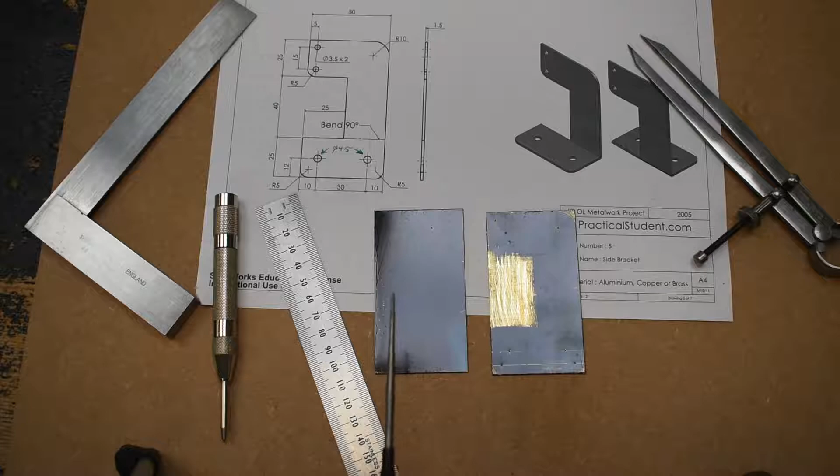This is the marking out of part 5 for the 2005 Ordinary Level Junior Cert project, the desk fan. There are two parts in part 5. Essentially they're the same, I'll speak when I'm finished about marking it out. There's two alternatives, so we're going to get started.

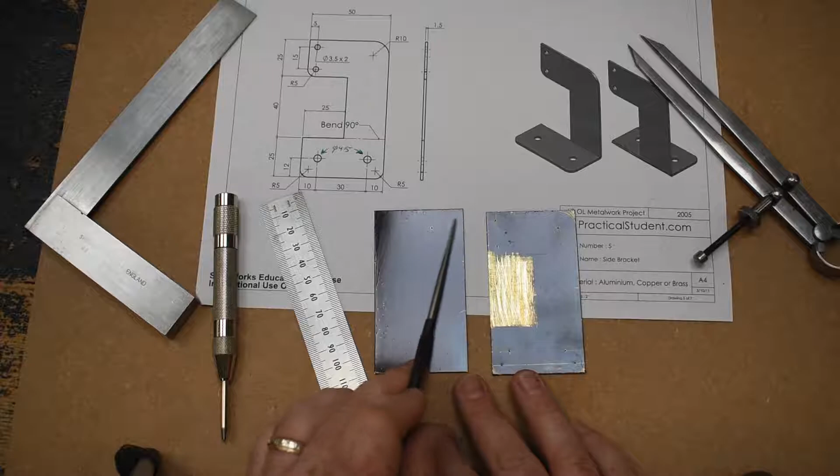The piece of metal I have is 1.5 brass. It's already cut on the guillotine to 90 millimeters in length by 50. We get those dimensions from 25 plus 40 plus 25 is 90, and 50 across. So put this second one aside for a second, we'll talk about that later on.

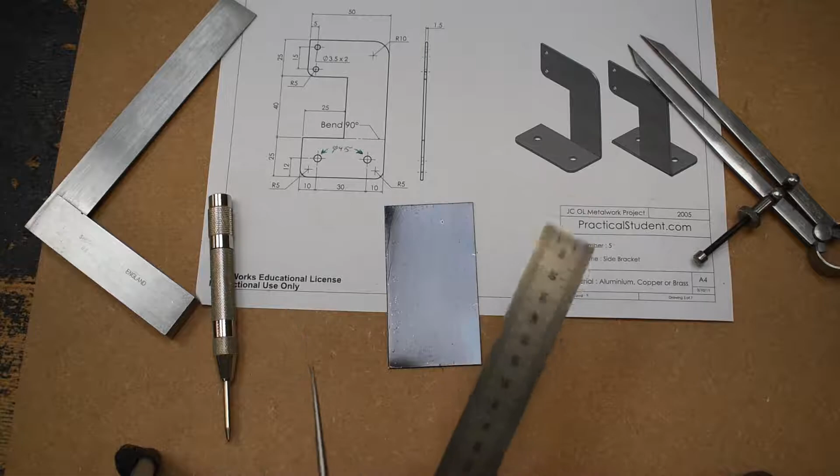I'm just going to mark out what we see here. I'll mark the general outline first, then do the curves, and then the location of the holes. So from the side here, it's up 25, then up 40, and that should leave me with 25. I'm going to mark those now.

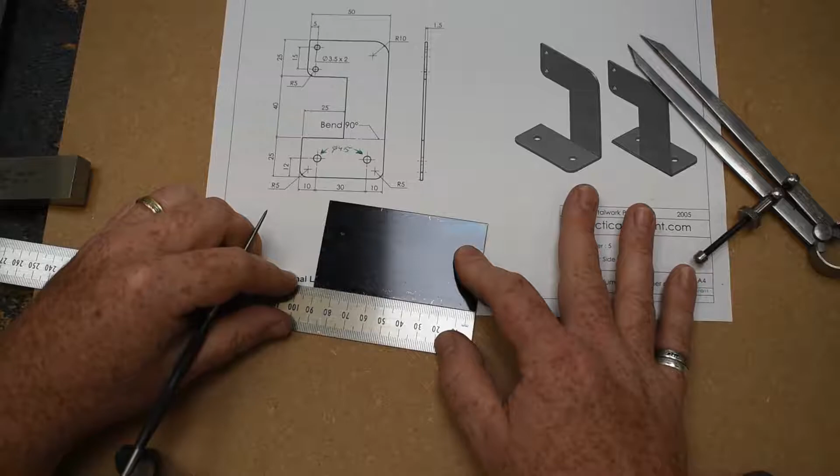From the bottom, marking 25. We could mark 25 from both ends, making sure everything is lined up. And T-square those lines over halfway across.

Again, thin material, so you must pick it up before scribing.

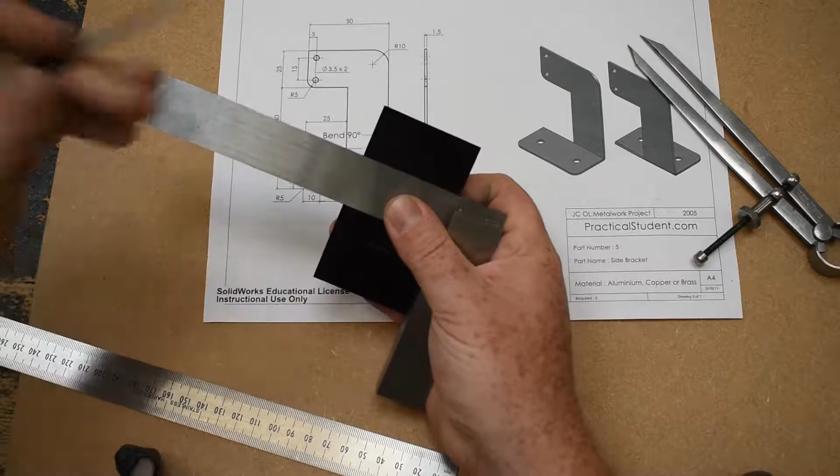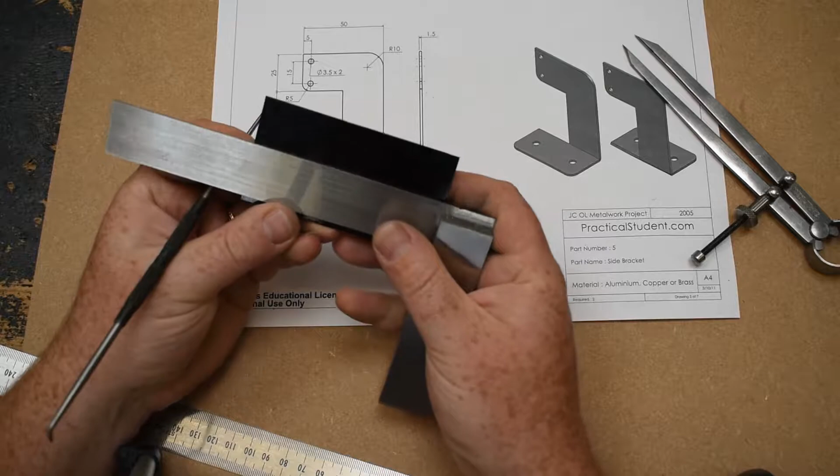Now this line up here is 25 in, it's halfway across, so again I'm going to measure 25 millimeters along the base, mark it, and T-square the line up just between the two other 25s that we have.

We're going to be removing this section later on, and I will show you how to best do that with a hacksaw.

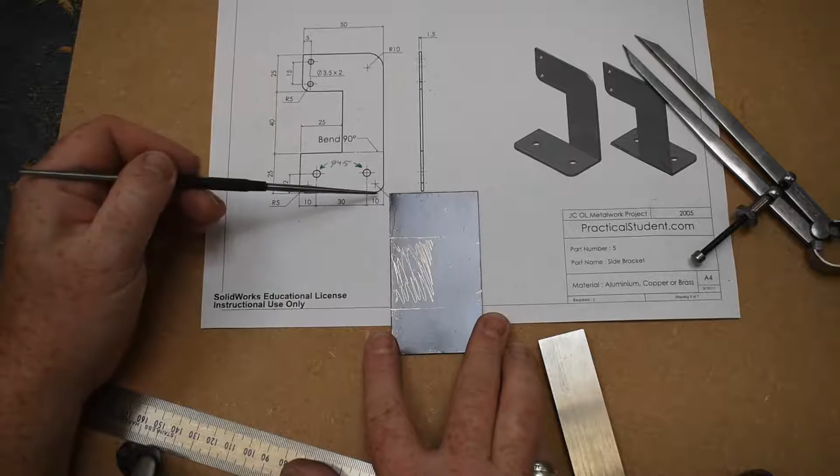Now that we've got those done, the next thing to do are the fillets. We've got 4 of them in total. I'm going to start with the largest one, and as always, wherever the radius is, that's the distance you come from both sides.

So in this case it's 10. I'm going to measure down 10 on this edge here.

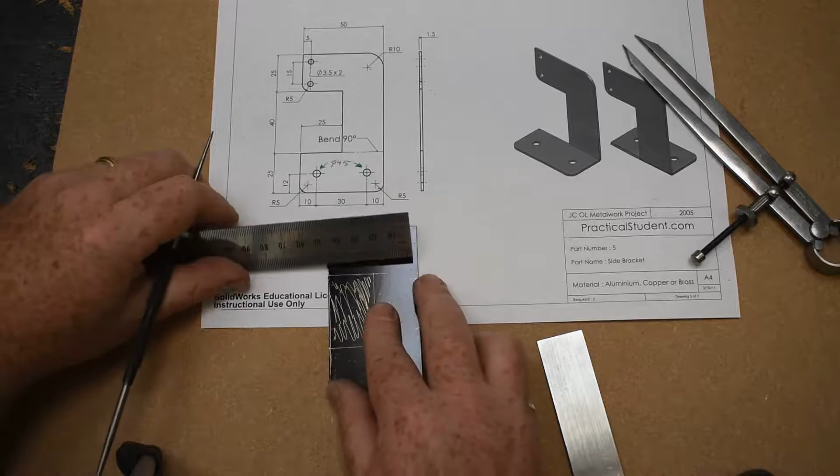Mark it, then measure across 10, and T-square both of those points to meet each other.

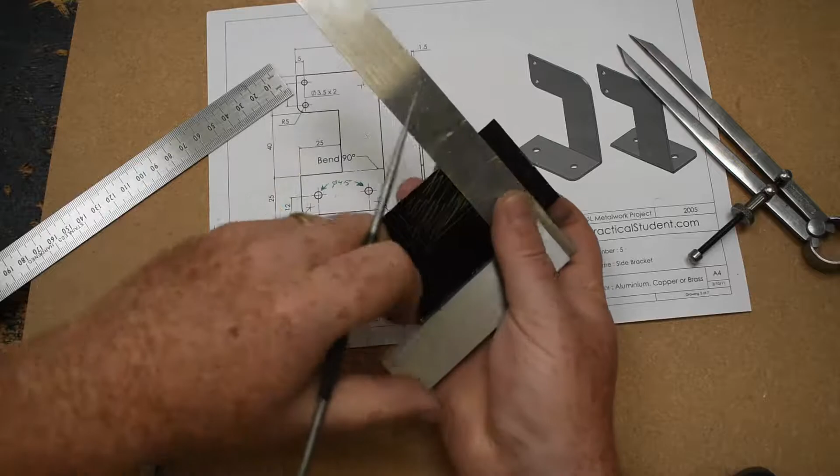Center punch that point, and I've invested in an automatic center punch to make my life easier.

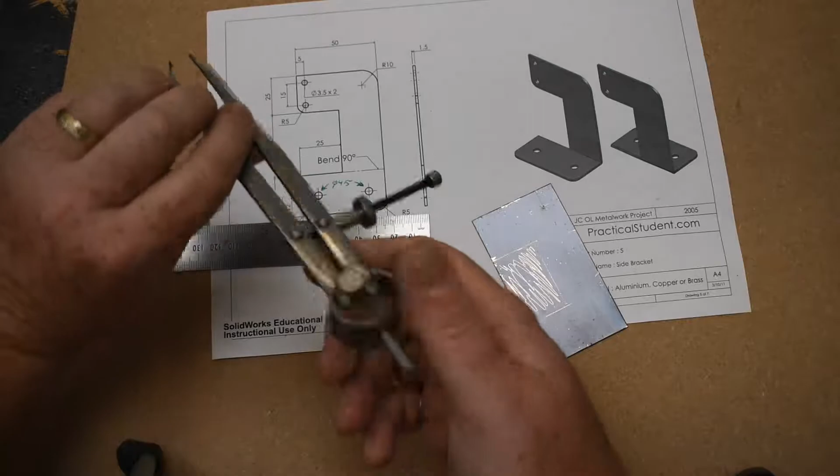Now we set our dividers to the same radius, 10, and draw the quadrant.

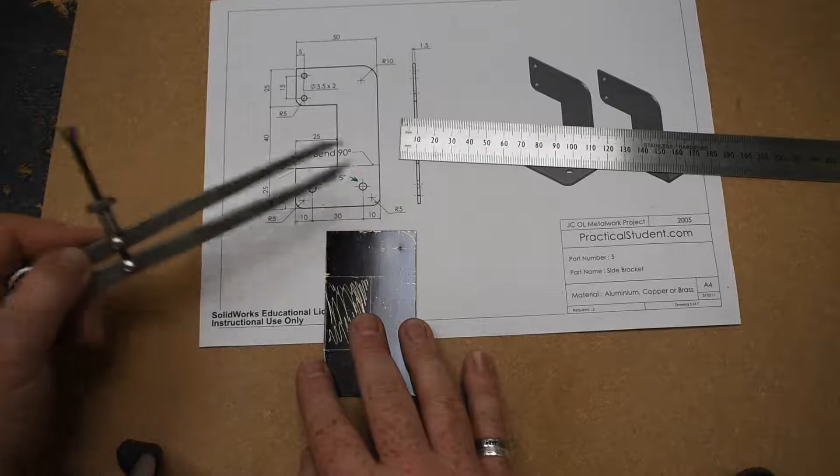We now have 3 more to do, 5, 5, and 5. I'm just going to try and mark those reasonably quickly. Measuring 5 across here.

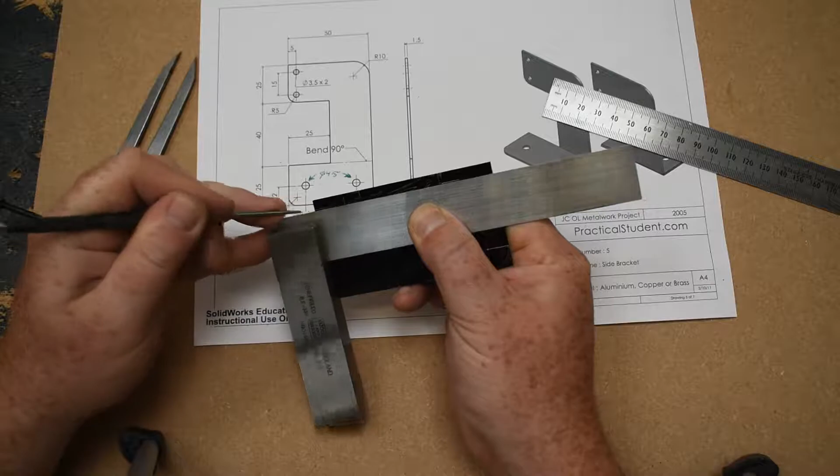I'm going to use my T-square and draw the line at this point, and to save time, do it down here as well. Now we want to measure 5 up this line.

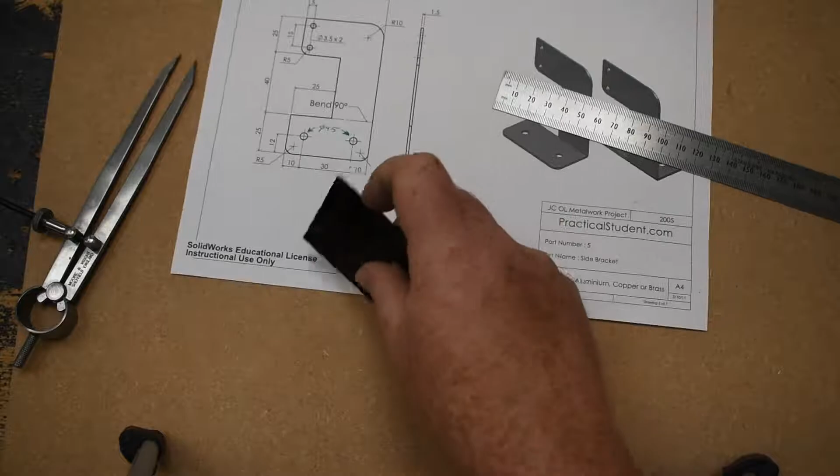I'm going to measure 5 here and T-square that across, because we needed it at 2 points at the bottom - here and over here.

And then finally I'm going to measure 5 in this line.

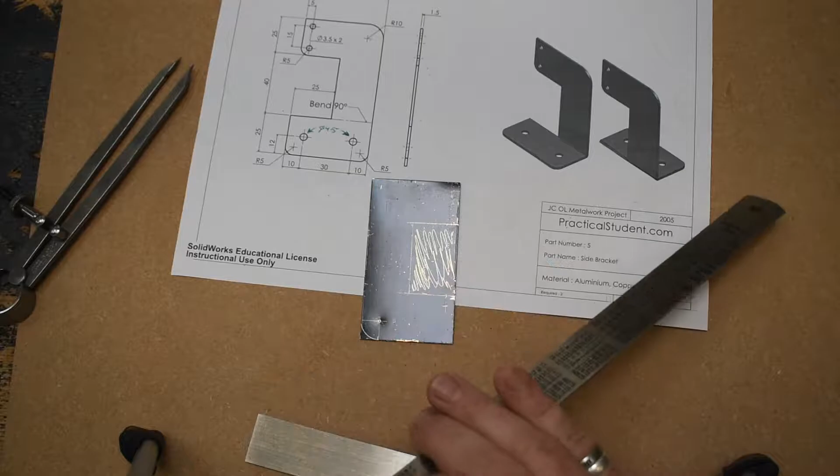Now we have the 3 centers for our quadrants, or our fillets. Center punch all 3 of those.

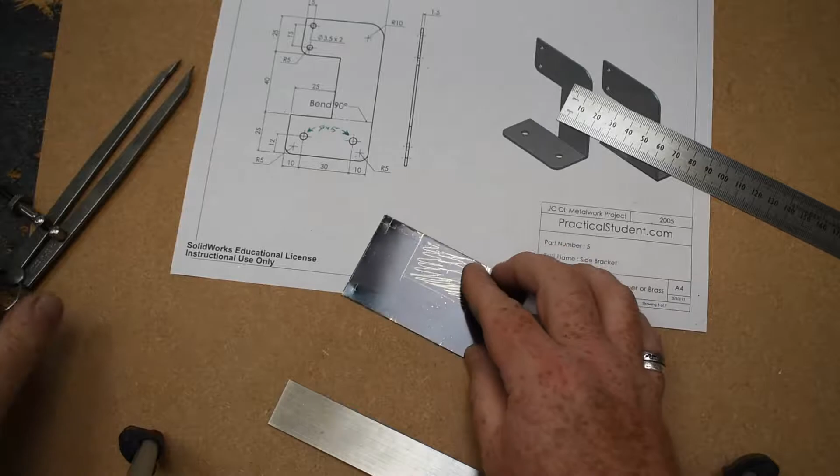Set 5 on the dividers, and we can draw the 3 quadrants or fillets.

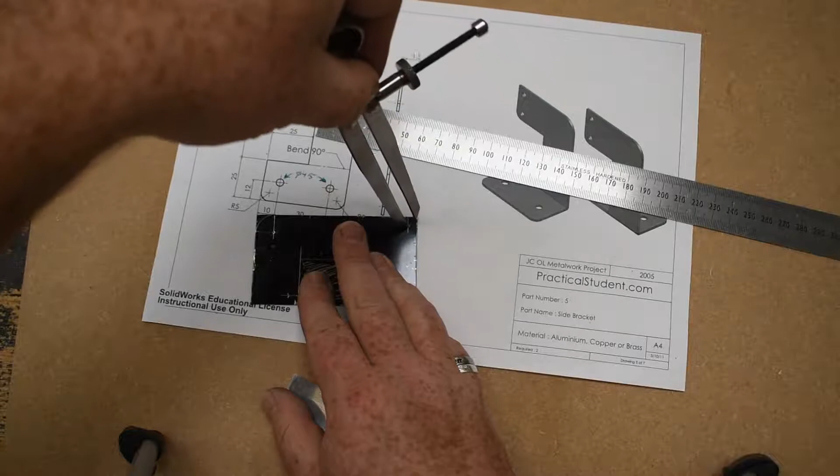Again, with smaller circles it's a little bit awkward, and you may have to fix things up when you're filing later on, just to get them as good as possible. There we go, the other one.

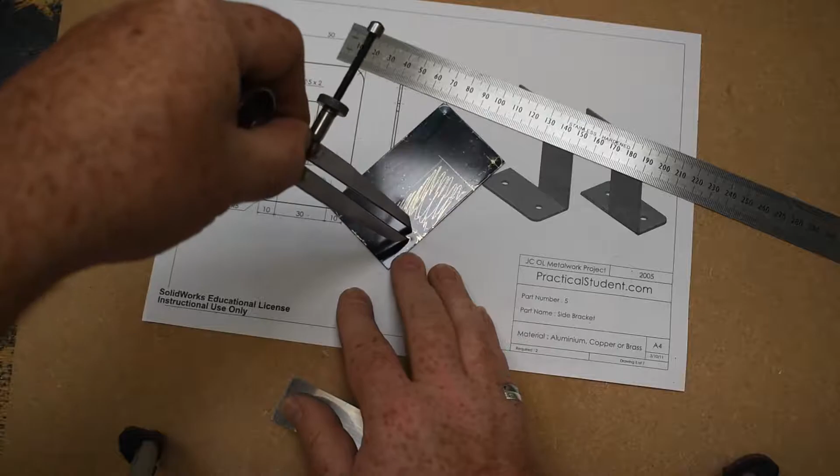So there we have the outline of our part completed. Now we just need to identify the 4 holes that we have to drill.

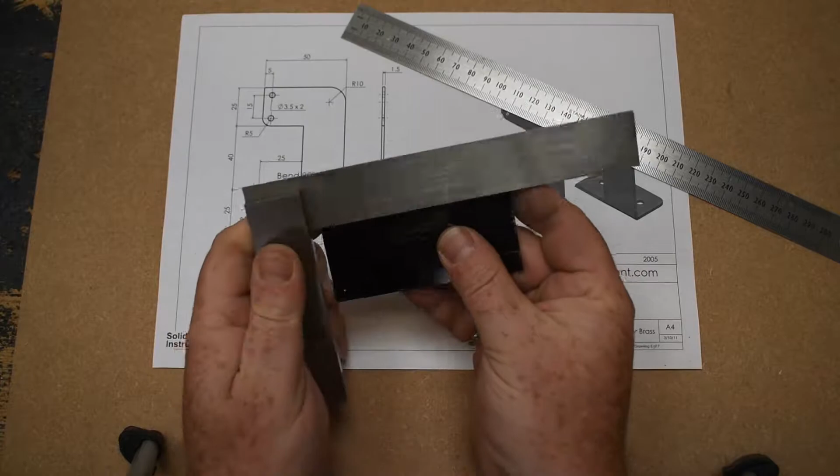Now these two, that's one of the centers for one of them, and we have another one up 15 millimeters for that. If I'd been thinking ahead, I could have scribed that longer.

I'll do that now. The 2 holes have 15 between them, so I'm just going to measure from this one up 15 and center punch it. That's the 2 holes there marked out.

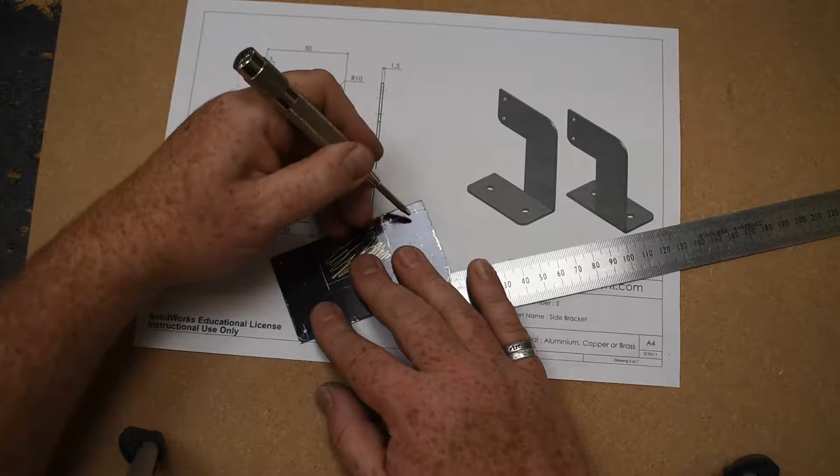And we have 2 holes here at the bottom. They're up 12 and in 10 from the edges. I'm going to measure up 12.

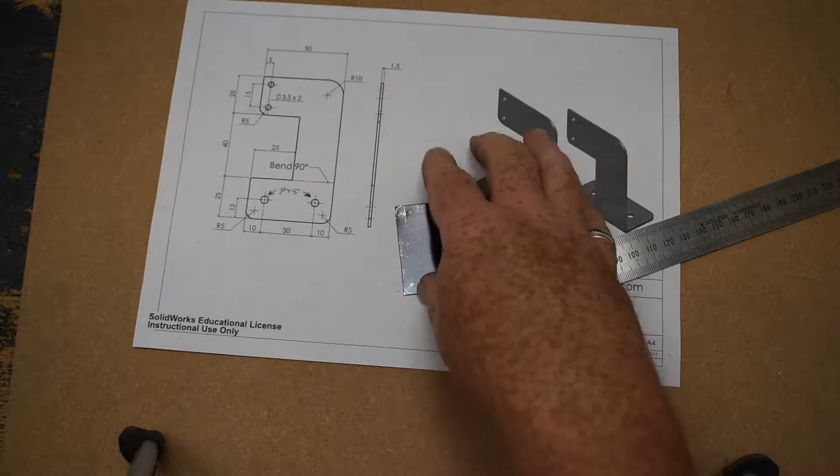T-square that line across, and then measure 10 from either edge on that line.

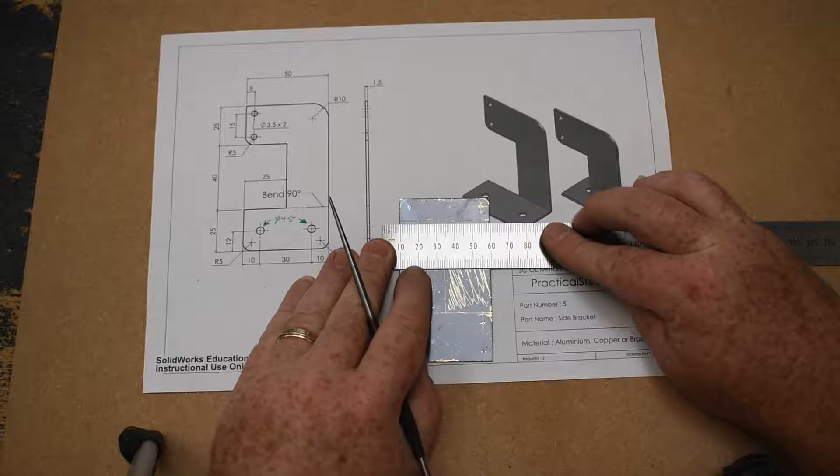Center punch both, and our marking out is complete.

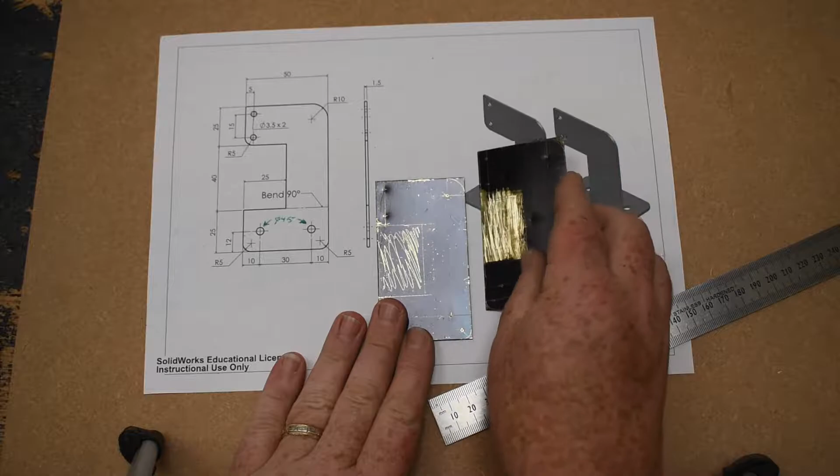To do the next piece, which I've already done, you can do the exact same thing. However, because both of these pieces are bent at the base in opposite directions, you will need to transfer this 25 line to the other side so that you can bend it the correct direction.

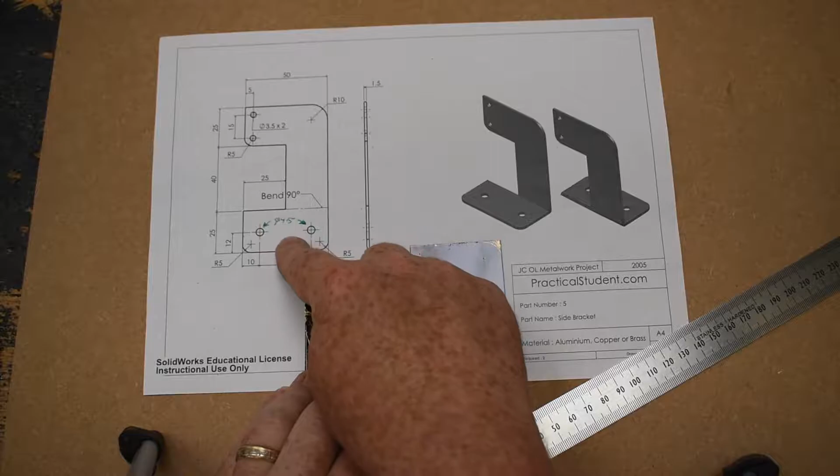Your other option, if you choose to do it, is to mark it out as a mirror image of this. So instead of having the gap on the left, you're going to have the gap on the right when you mark it out. It's basically getting it and flipping it over. Might be a bit more challenging to do, but it works equally as well.

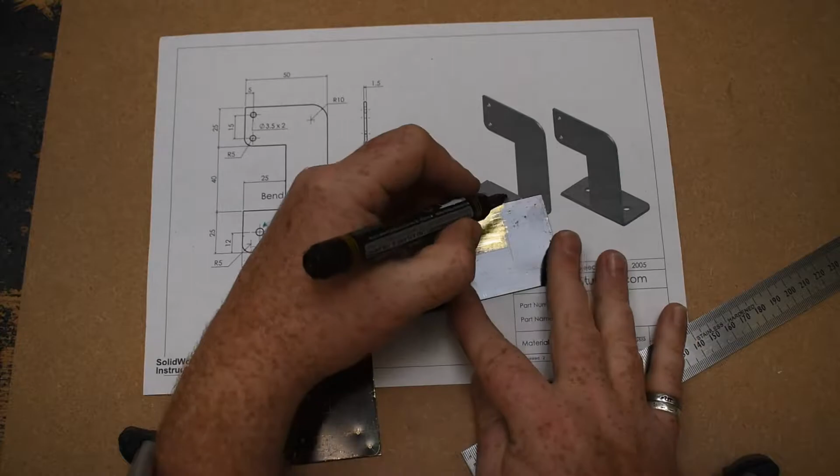Now the last thing I want to point out in this stage is, for the cutting out of this section, what you want to do is cut straight down here, like that, and straight down here.

Once both of those two cuts are complete, go from one of the tops to the bottom of the other side. So we cut, let's say, right, like that, for example.

That removes this whole triangle. And then you can cut from here down to there, removing that triangle.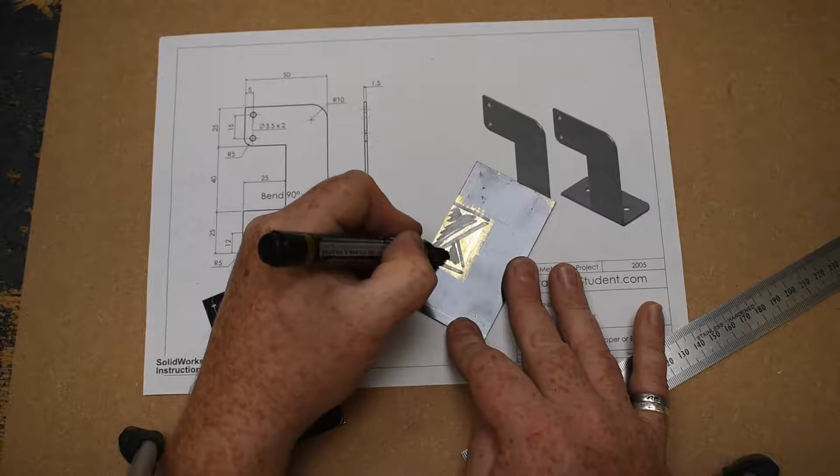If you have a small junior hacksaw or something, you can probably take more cuts, removing more material bit by bit, until eventually you only have a small bit to file at the bottom. I'll be doing that on the bandsaw, but you'll get the same idea.

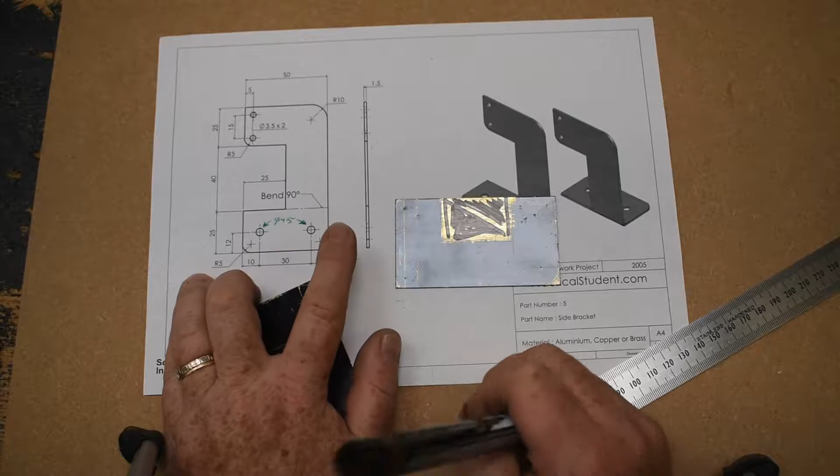Right, on to drilling. By the way, it's not on this drawing, or it wasn't on it, but it will be in the drawing that's linked in the description. That's a 4.5 for the two of those, and 3.5 for these.

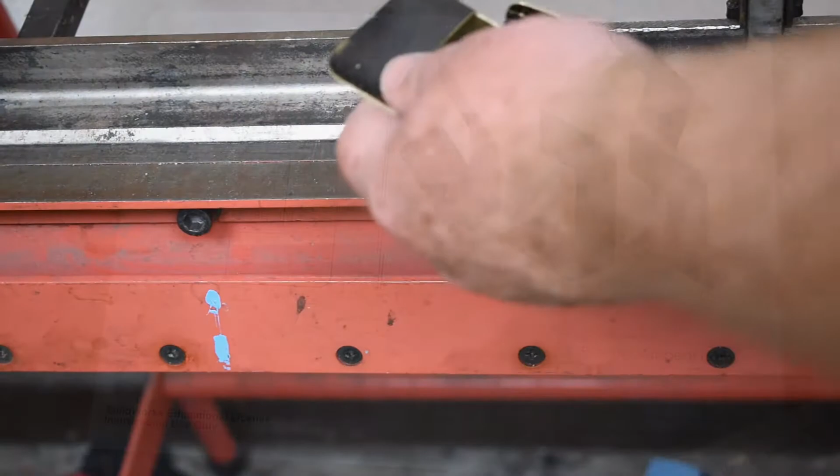And that's the completion of part number 5, the 2 parts. The biggest mistake that most people make, if they're going to make a mistake in this part, is to bend these 2 pieces the same direction.

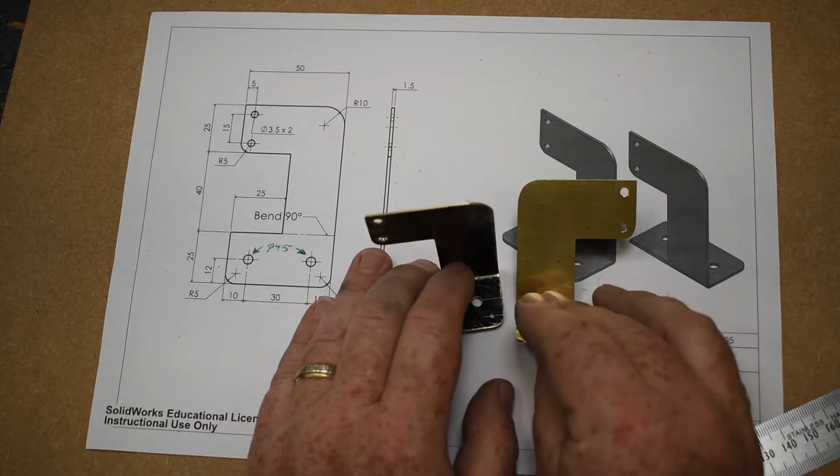Notice the bases are bent in opposite directions. That is the important thing to remember there, and you do that by putting them into the bending machine so that they're mirror images of each other.